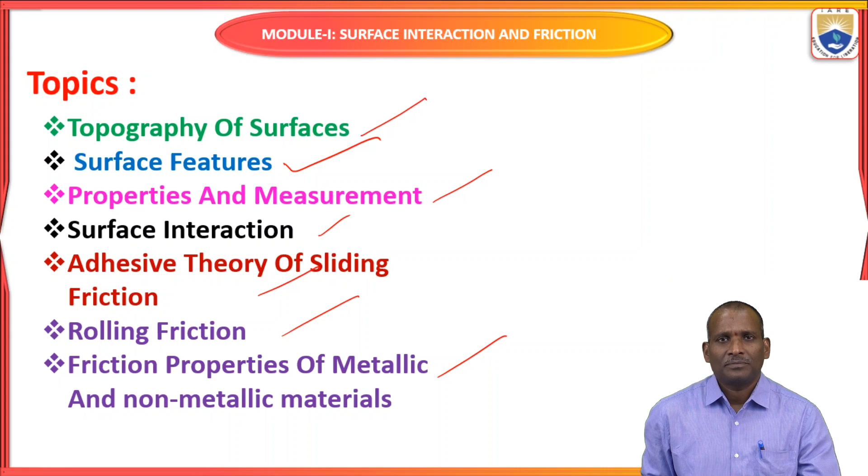The friction properties of metallic and non-metallic materials: what are these properties? And then friction in extreme conditions, and thermal considerations in sliding contact. All these topics we will learn under Module 1, surface interaction and friction.

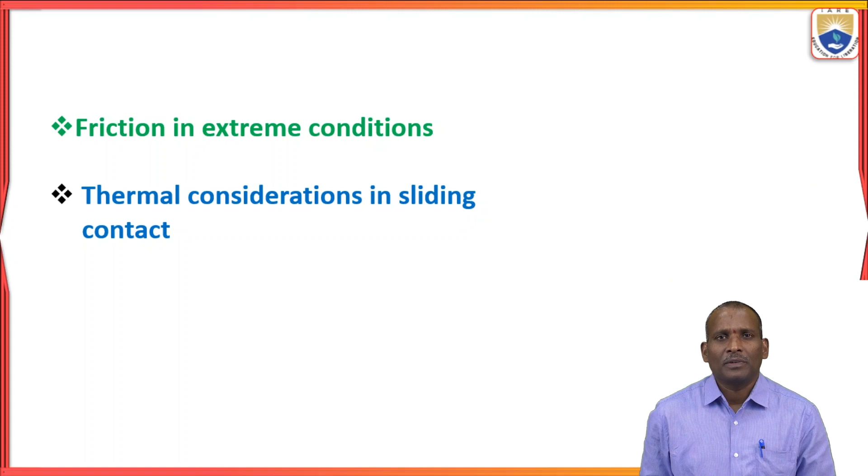Now we will see one by one from the start. First I want to give a small introduction about the tribology subject. Tribology is the subject study of friction, wear and lubrication. This subject covers these three topics: friction, wear and lubrication.

The word tribology came from the Greek word tribos, which means rubbing - the rubbing of one part on another part, the contact between two surfaces. It may be smoothly rubbing or roughly rubbing, depending on the surface.

That's why we should learn what is the importance of surfaces in tribology and how many types of surfaces are there, which we will see in later topics. The term tribology was formed in 1966, and it is defined as the science and technology of interacting surfaces in relative motion.

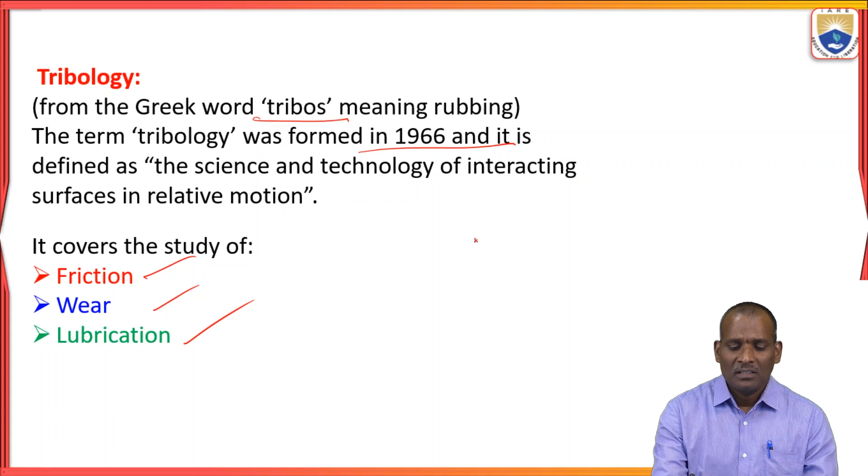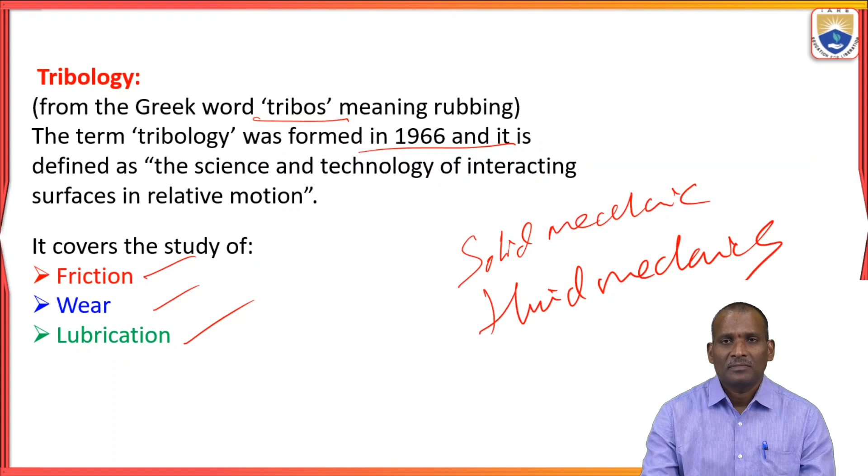What are the basic engineering subjects? Solid mechanics, fluid mechanics, material science, and lubrication chemistry. All these subjects are covered by tribology.

Particularly while designing mechanical components, that is machine components, tribology plays an important role. Why? Because continuously in mechanical components are rubbing and in contact with one another, so friction is always generated.

To reduce friction, lubrication is also required. We will study all these topics - the lubrication properties and the friction types - in the coming slides.

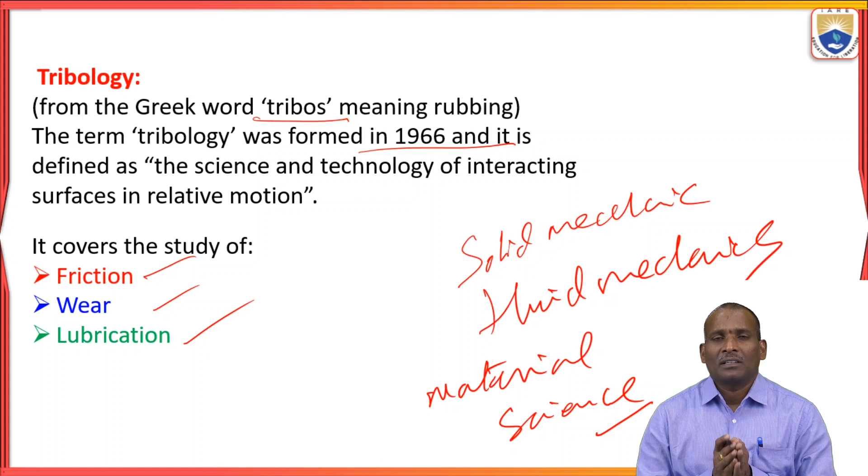Mechanical components always undergo friction and wear. That's why tribology is at the heart of their functions. In gear functions and bearing functions, tribology plays a very important role. That's why we should learn tribology concepts.

See in this diagram, they are creating fire by using sticks. This is a very old process. In ancient times, around 5 lakh BC, early humans learned that by rubbing sticks together with great force, they could create fire. By applying force, they rub sticks together.

Due to the friction property, the fire is created. They didn't know this property was friction, but at the time they wanted some fire for cooking purposes. That's why they used sticks, rubbing them together, and the fire was created.

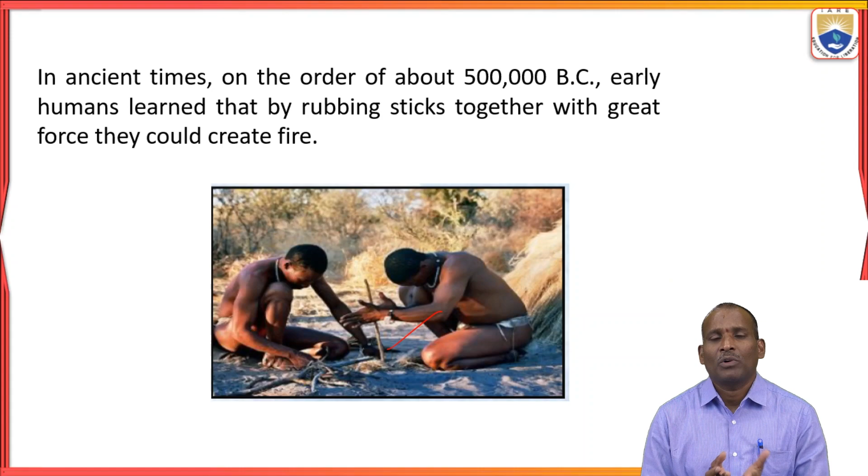Similarly, see in this picture, rolling motion requires less effort than sliding. What do you mean by rolling motion and sliding? Already I told you at the start, friction is of two types.

One is rolling, another is sliding - rolling friction and sliding friction. Which one is better? Compared to sliding, less friction is generated in rolling. But with sliding, friction is generated and more effort is required to pull the vehicle or any object.

That's why at that time the wheel was invented, around 3500 BC. First they were using sliding. So instead of sliding, they created the wheel.

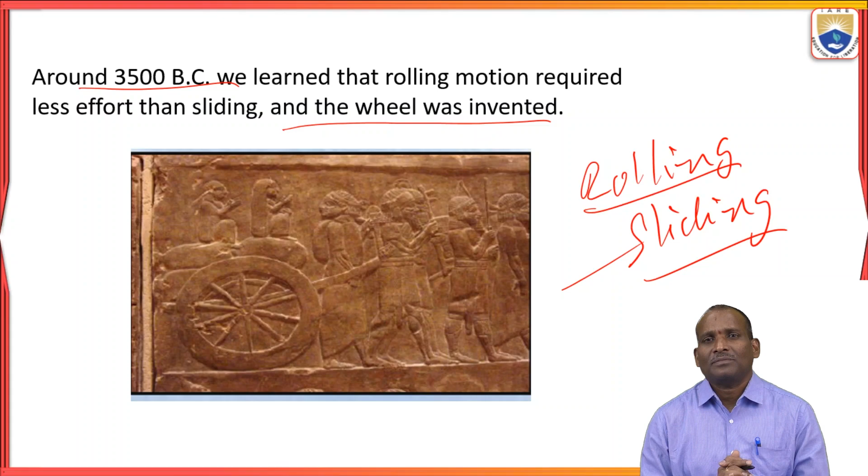Why? Because in rolling, less effort is required. It moves freely. So tribology is a multidisciplinary subject, not only for one particular branch, not only for mechanical subjects. Tribology properties are important everywhere, in multidisciplinary subjects. What are they? The multidisciplinary subjects are material science, environment, life cycle assessment, nanotechnology, lubrication chemistry, tribochemistry, biomechanics, friction, molecules, machine design and machine elements, solid mechanics, fluid power systems and fluid mechanics.

It is a study of friction. One is friction and wear properties, and then lubrication. Which type of lubrication is required? What is the lubrication mechanism during relative motion? Example, bearings and gear transmission systems in mechanical engineering.

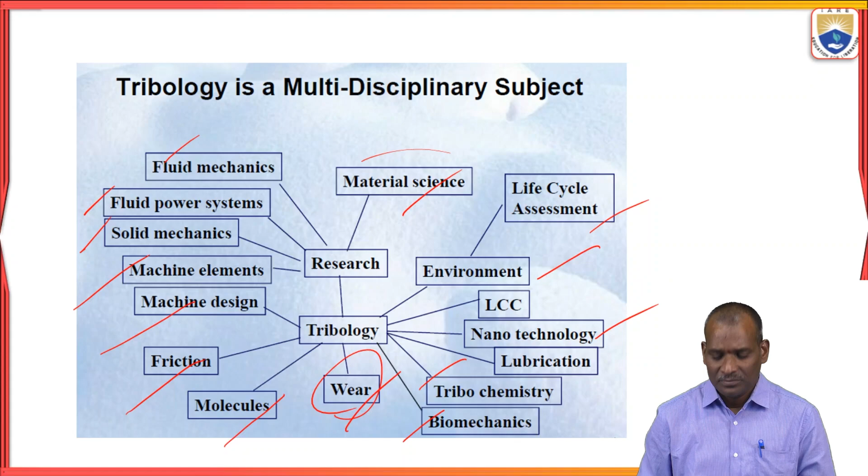As I already told you, tribology is everywhere - not only in mechanical engineering, not only in chemical engineering, but also in other branches like electrical engineering. That's why you can say tribology is everywhere.

Example, the tire rolling on the road. High friction is required, as shown here. For the tire material and the road, there is friction. How much friction is required - high, low, or medium? Due to the friction property, there is grip between the tire and the road. If less friction is there, suppose there is no friction, the slipping chances are very high when friction is very low between the tire and road.

The tire is one surface and the road is another surface. Whenever these two surfaces interact and contact one another, friction automatically generates. So we can create wonders using this friction. Sometimes there are advantages, and sometimes disadvantages.

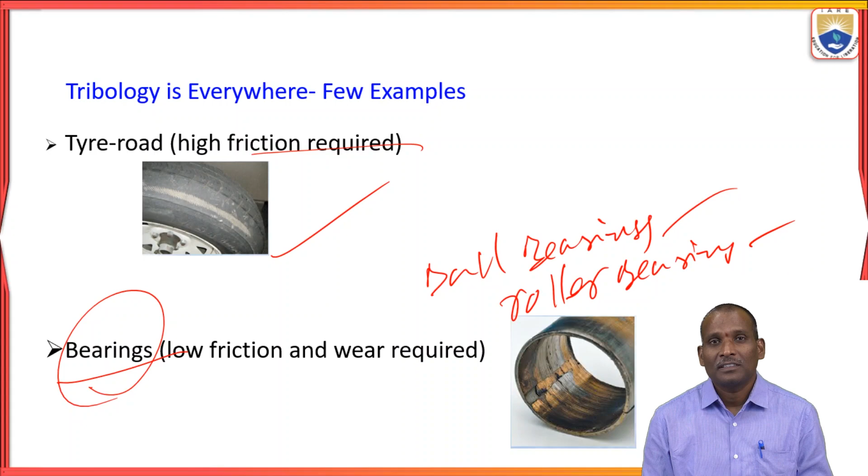Bearings are classified into ball bearings and roller bearings. Two types of bearings are there, and while designing these two, the tribology concepts are very important.

Next example, joints. Joints are classified into two types: temporary joints and permanent joints. Permanent joints are fixed together, for example welding - two plates are welded together with weld material. If you want to dismantle or replace one plate, you can't remove it, because it's a permanent joint. If you want to replace it, you have to completely destroy the joint.

Whereas in temporary joints, like nut and bolt, you can replace, remove, and dismantle them. Whenever you want to dismantle the assembly, you can easily do so. In this case, low friction is required and no wear in contact - there is no wear in contact. The nut contacts the threads on the bolt. This is one type of joint, called a temporary joint.

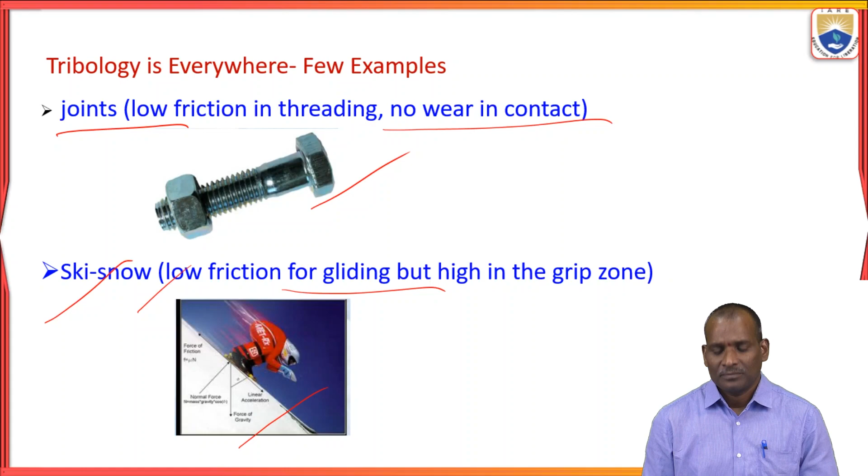Next example, shoe and floor. Medium friction is needed for easy walking and dancing. Daily we are walking on a road, on a floor, with shoes, so there is friction between the shoe and the surface. How much friction is required here? Not high friction and not low friction, only medium friction. Then only can you walk very easily on a floor. While doing dancing or playing, the medium friction is required.

Next example is the brake disc, also a mechanical component. Controlled, stable friction is required, not too low or not too high, very stable, like medium friction. While using disc brakes, this type of brake we use for vehicles. Friction is required for stopping and starting. If you want to stop the vehicle while running, the brake is required. How does it function? With the help of friction property. Without friction, we can't stop the vehicle. Here we are using one medium, the brake surface. So which type of surface is required for the brake material? You have to study the surfaces, types of surfaces.

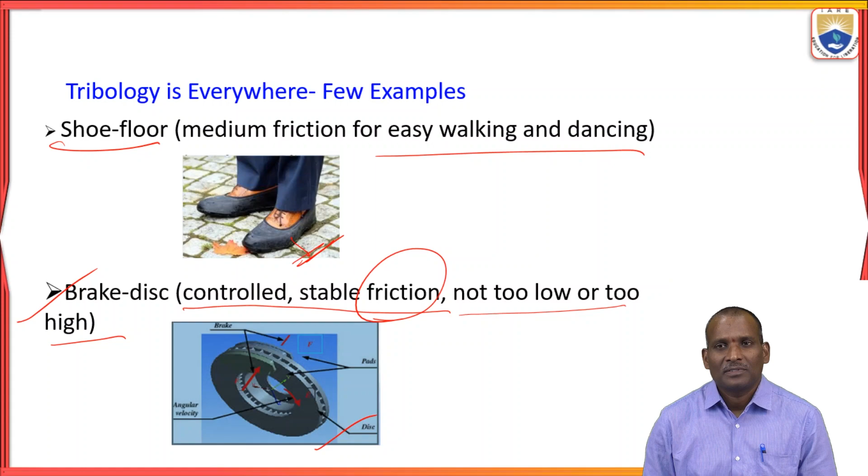Next, cam and follower. The cam and followers are used in engines for valve opening and closing. This type of mechanism is required in IC engines. In between the cam and follower, there is a contact, a point contact. There is no wear and low friction. By using this mechanism in engines, the valve opening and closing will occur.

Next, piston, ring, and cylinder. This is the piston and these are piston rings. There is friction between these, while the piston moves inside the cylinder, a rubbing action occurs between the cylinder and the piston surface. On the piston surface, the rings are mounted. These rings are classified into two types, oil rings and compression rings. Detailed explanation is not required at this stage. We are concentrating on wear property and friction property, and the third one is lubrication property. That's why the tribology subject revolves around these three topics: friction, wear, and lubrication.

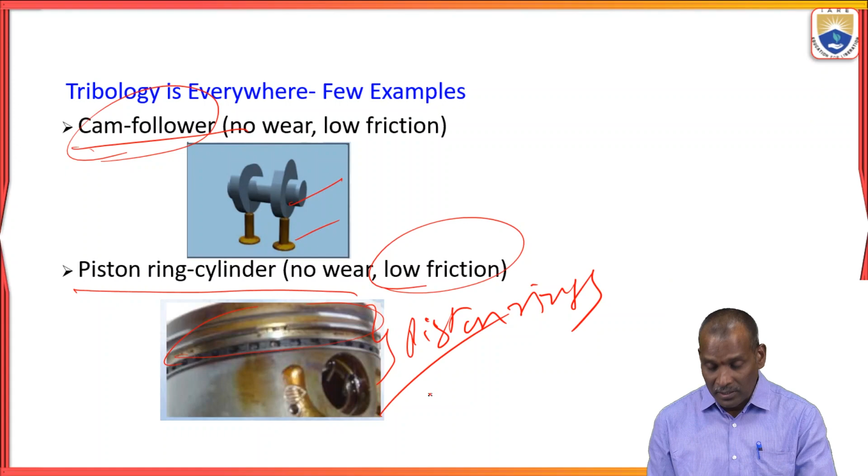While designing piston rings, you should concentrate on wear properties and friction properties, and at the same time lubrication is also required while moving. It moves from top dead center to bottom dead center, and again bottom dead center to top dead center, where it is in motion. We will study this in four-stroke engine working. For this arrangement, no wear and low friction is required, not high friction. Suppose in the piston, while rubbing, while in relative motion, high friction occurs, what will happen? The friction will damage the piston rings. After some time, the piston will jam in the cylinder, and there is no further movement in the cylinder. If the piston movement is not there in the cylinder, there is no power, no power stroke, no output. The engine will not move forward. That's why friction property is also required here while designing the piston and piston rings.

Next example, in our daily routine life, we use chalk and board while teaching lessons, chalk on a board. Here, controlled wear process occurs. Some friction is there and wear is also there, but it's controlled wear, not too much wear. That is controllable, so we can easily manage that wear.

Due to the wear property, what will happen here? While writing on a board, the chalk material is scoring. So after some time, what will happen? The material, the chalk, gets destroyed in the form of powder.

Similarly, pen and paper is a controlled wear process. We can control this type of wear, but in an engine's case, ball bearings, rolling bearings, pistons, cams and followers, we can't control the wear process. If you are not using proper material, proper lubrication, or not designed with proper surfaces, then wear must be possible.

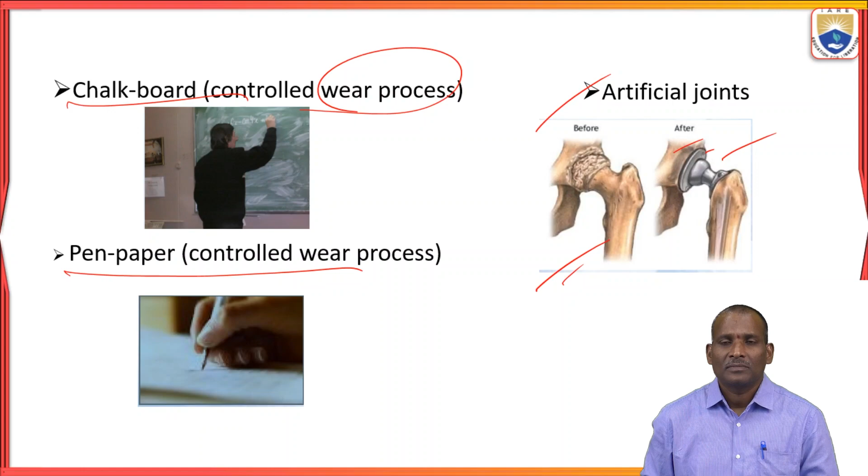Next, now we will discuss about the tribo system. In this tribo system, there are 4 elements. One is element 1 and element 2.

Element 1 and element 2. These two are contacting one each other.

So there is a tribo element 3, the interfacial medium, this one. When it is sliding or rubbing, then tribo element 4 will act as the surrounding environment.

That is element 4, the surrounding environment, which includes temperature and moisture condition.

So tribo element 1, element 2, and element 3 is the medium, the interfacial medium, like a lubricant. This is said to be the tribo system.

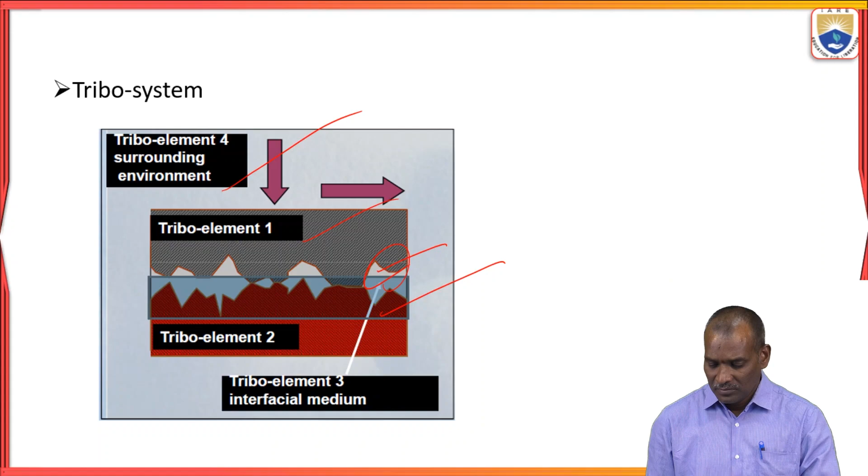Now, considering the complexity of the tribological system, it may be pointed out that friction and wear characteristics of materials are not their intrinsic or inherent properties.

But are highly system dependent. So intrinsic properties are inherent properties, as opposed to extrinsic properties.

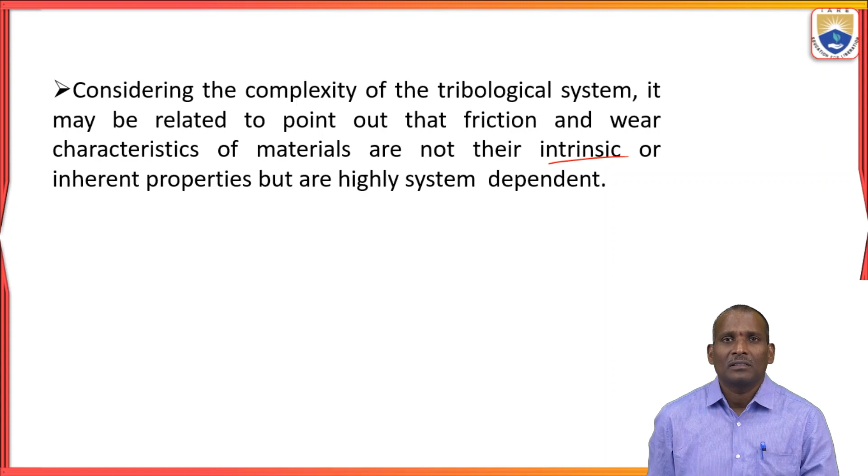The intrinsic properties are like boiling point, melting point, and density of the material. Extrinsic properties are mass and volume. The wear characteristics of materials are not these intrinsic properties.

So coming to the topic of friction, we meet friction in all aspects of everyday life, by walking, moving, dancing, and stopping or turning a car.

So in walking, everyday friction appears, and then moving, stopping or turning a car.

Suppose you want to stop a car while moving on a road. With the help of the friction property, that component is called a brake.

Turning, if you want to turn a car, by using the steering mechanism you can easily turn a car.

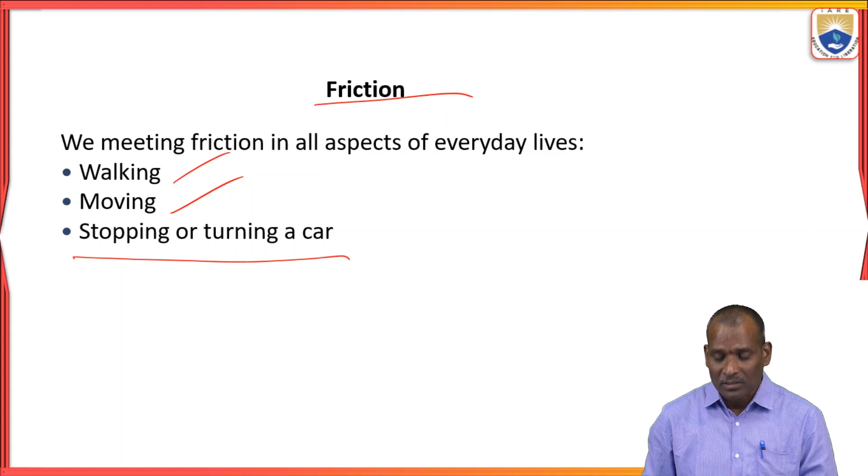So the steering mechanism has bearings and lubrication. It works on friction and lubrication.

The Egyptian pyramids and tombs led to the invention of the wheel. Why? Because of the major cause of energy dissipation, frictional heat generation, and temperature rise.

Suppose here one block is there. You are applying force on this block horizontally, that is the tangential force.

So always one force will act perpendicular to this tangential force, that is the normal force.

And one important force is there between these two blocks, that is friction.

Frictional force. So frictional force is nothing but resistance to the motion.

So in the opposite direction, suppose you are pulling this object like this, the friction force will act in the opposite direction.

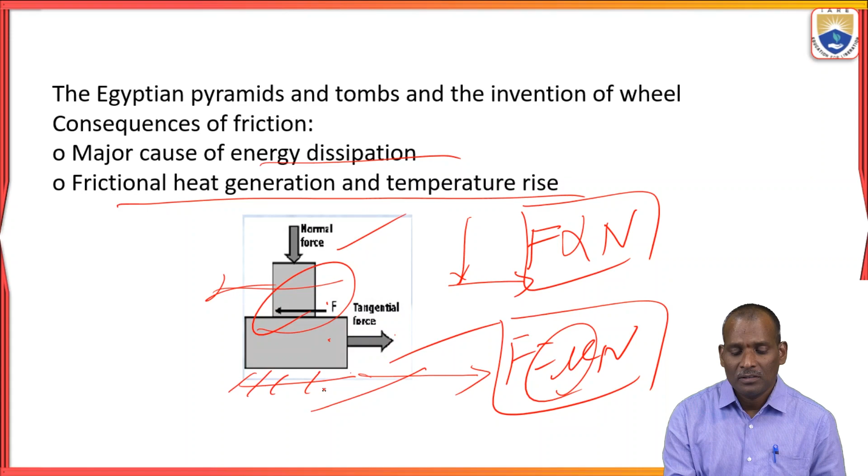Next, examples of the occurrence of sliding friction. Rolling friction is there and sliding friction. An example for sliding friction is a machine tool's sideways.

Examples for this sliding: these slides move one another, so here the sliding plates are there in the machine tool.

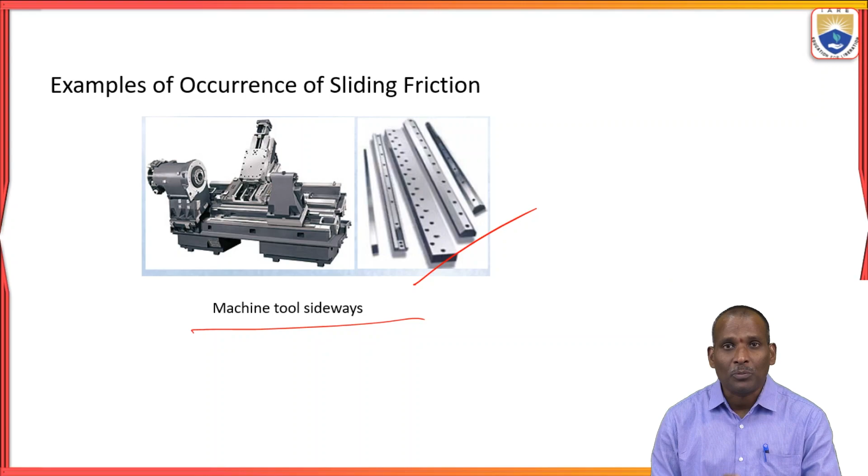The sideways are required for this machine. That's why here the sliding friction property is very important.

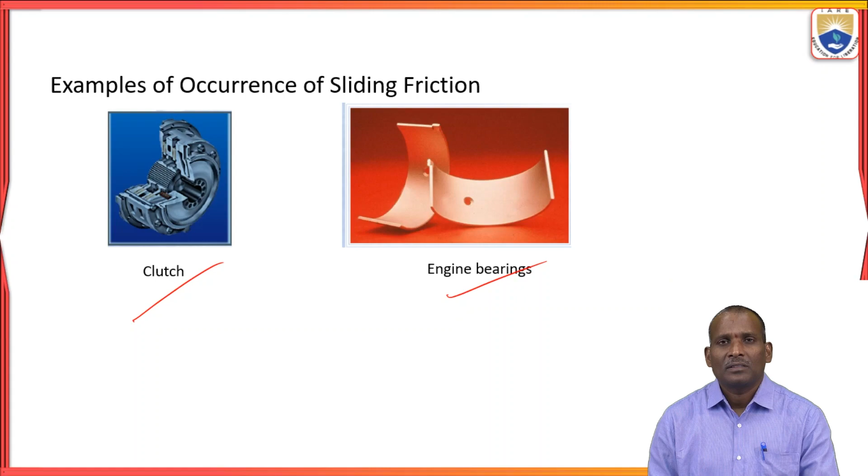So here also, the clutch and engine bearings, the clutch movement, clutch plates, the friction between one plate and another.

Occurrence of sliding friction here: ball bearings, wheel on rail, and gear transmission.

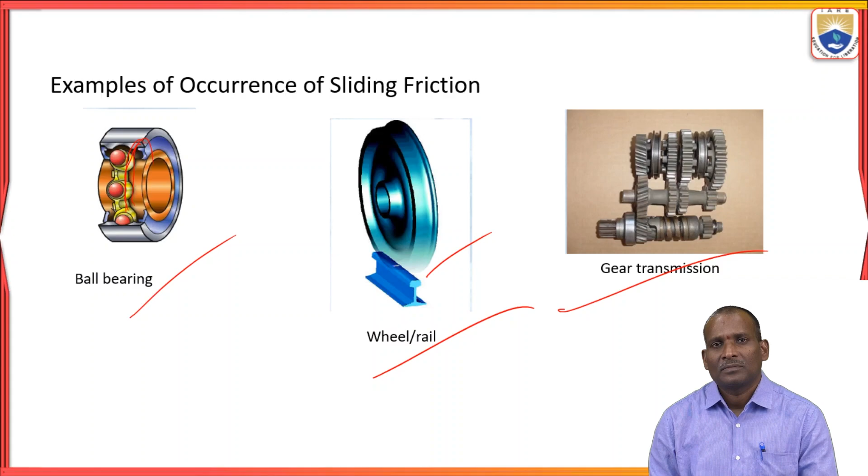So here the wheel on rail is sliding, and at the same time the sliding motion and rolling motion are also there. Here ball bearings rolling, and due to this rolling, the balls are moved slides like this. So these balls are arranged in a case.

Next, the friction is affected by the following points. What are they? We will see. The first one is the presence of wear particles and externally introduced particles at the sliding interface.

Suppose two components are in contact, and the two component surfaces are in sliding motion. So there is a presence of wear particles in between this sliding. Suppose two sideways are moving like this, sliding, and in between these, suppose some wear particles are present. What will happen? The friction will be generated. Due to this friction, some material will damage, and you have to replace this sideways.

Similarly, the second point: relative hardness of the materials in contact. So this material's hardness and this material's hardness are different. They are in contact, then possible friction. Externally applied load and displacement.

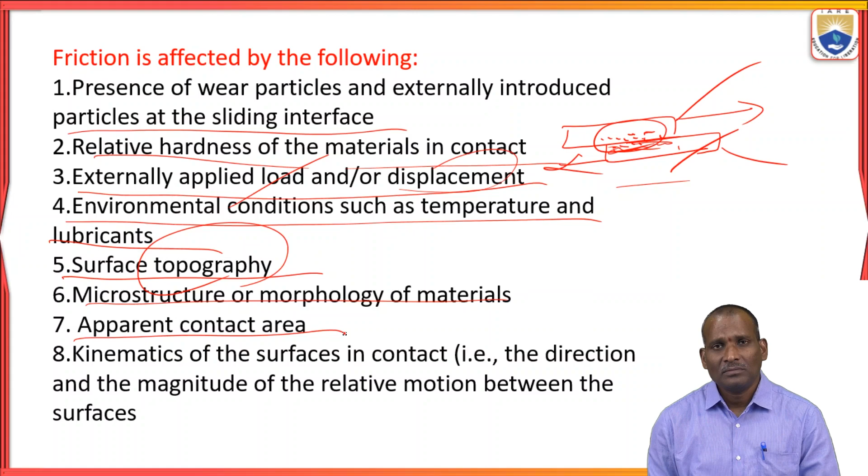Microstructure or morphology of materials and apparent contact area. What is the contact area between these two? Suppose here the contact area is the surface contact, or suppose two wheels are contacting like this - then there is a point contact between these two. So what is the area of this contact? The friction depends upon this area of contact.

Suppose a surface is there as a block, and I apply load like this. This is normal force and here tangential force.

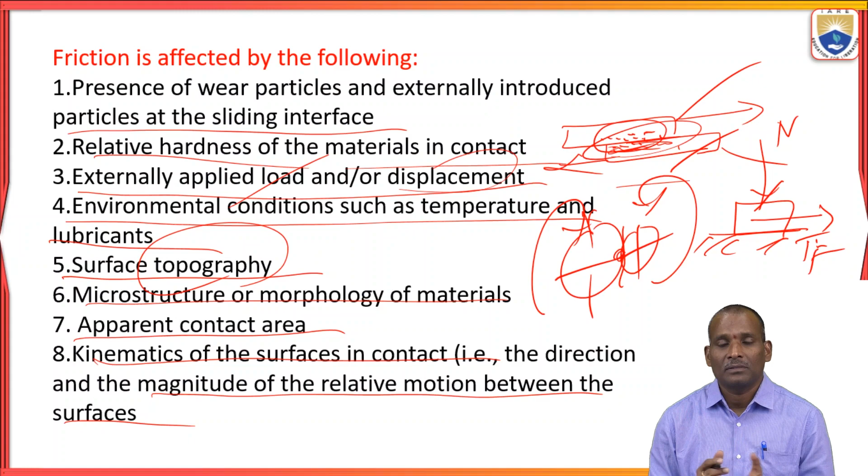Next is kinematics of the surfaces in contact - that is the direction and magnitude of the relative motion between the surfaces. So kinematics of the surfaces means the direction in which you are applying load, the magnitude of load, and the relative motion between these two surfaces. That will lead to friction. So that's why friction is affected by relative motion between two surfaces.

So that's why surface topography plays an important role in determining the performance of various tribological machine components. Suppose you want to determine the wear properties of a particular material, wear characteristics - if you don't know the surface topography, you can't calculate, you can't analyze. That's why the type of surface topography plays an important role while determining the performance of various tribological machine components.

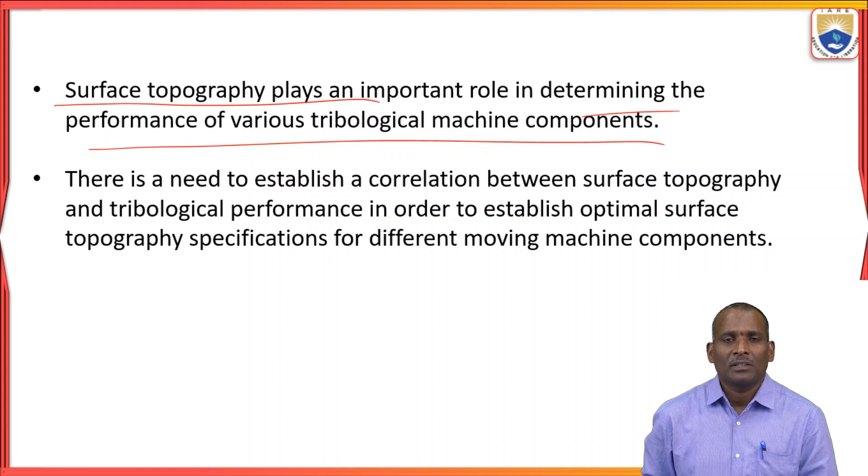So there is a need to establish a correlation between the surface topography and tribological performance in order to establish optimal surface topography. First you establish a relation between these two, compare and validate the tribological performance and surface topography for different moving machine components. Then only you can find the optimum surface topography for a particular application, for particular moving machine components.

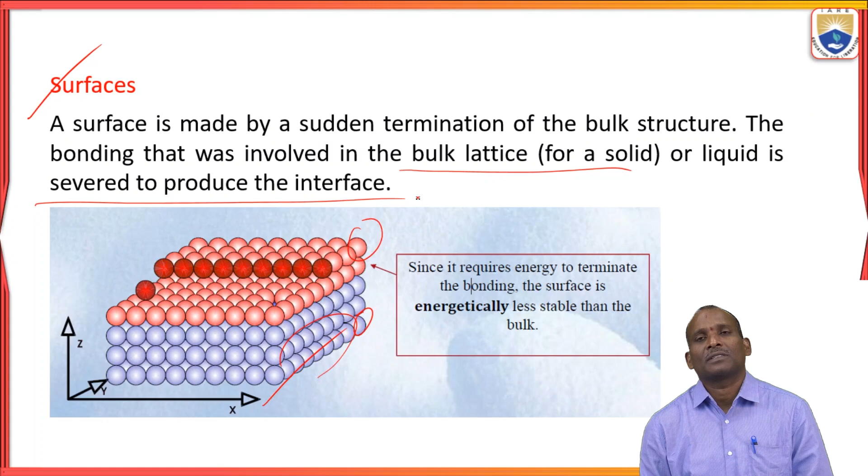So this type of energy, required to terminate the bulk structure, is called surface free energy. In the case of liquid interfaces, this energy is called surface tension. So surface free energy is the term used for solid interfaces, and surface tension is the term used for liquid interfaces.

So why is surface required? Without a surface, you can't transfer the force from one surface to another surface. You can't apply, you can't use the application without another surface. Suppose you want to write a topic on the blackboard - you want one surface, that is pen and paper. Similarly, chalk and board.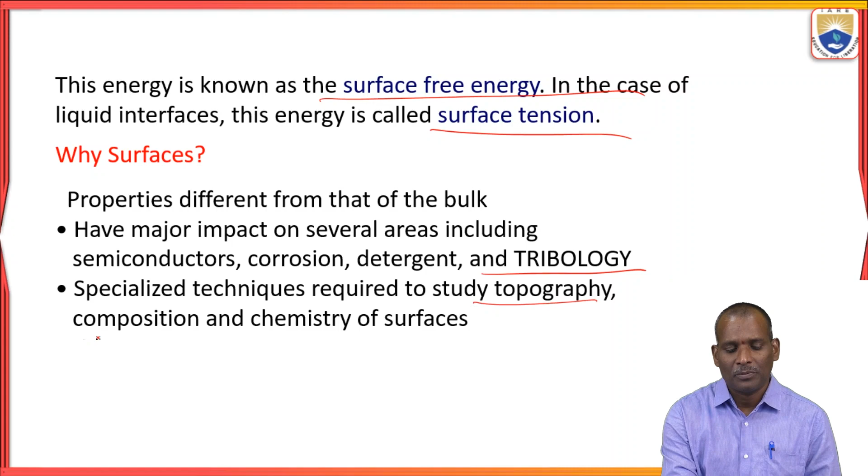Surfaces have a major impact on several areas, including semiconductors, corrosion, detergent, and tribology systems. Specialized techniques are required to study the topography, composition, and chemistry of surfaces.

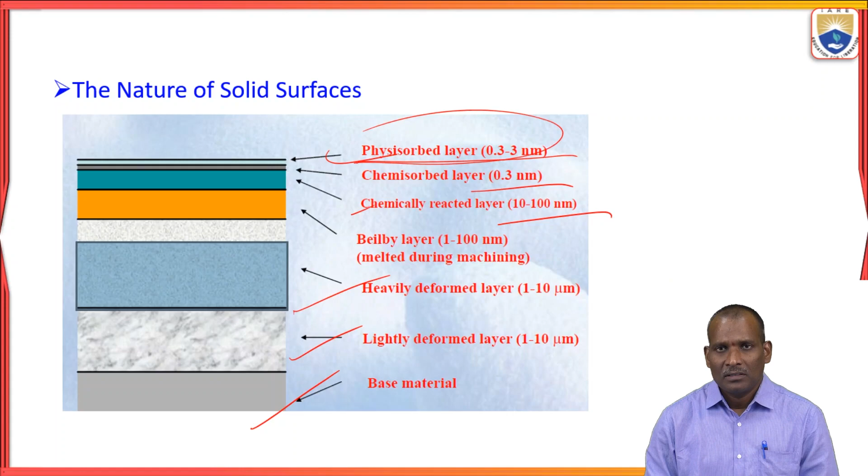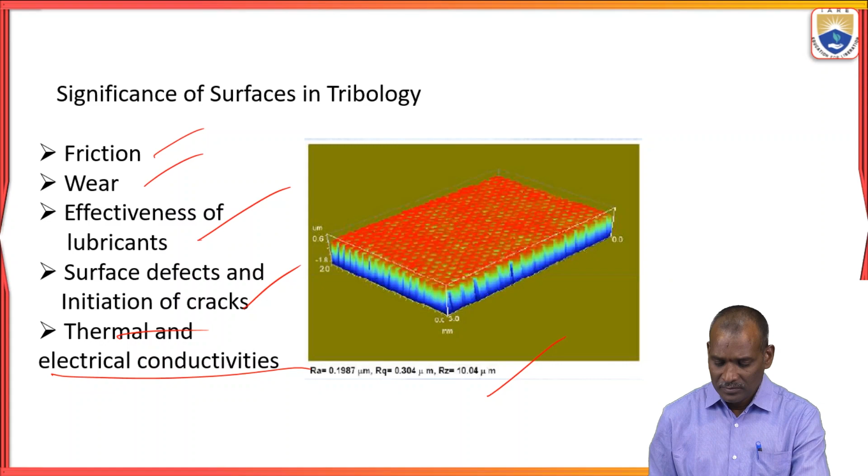Surface defects are caused during manufacturing. When manufacturing a machine component, a lot of defects can occur. Defects occur due to cracks, internal or external, craters - which are nothing but small holes - folds, seams or laps, and heat affected zones.

All these defects you can't see directly. By using some examination methods, you can detect them. There's also intergranular attack, metallurgical transformations like temperature, pressure, cyclic transformations, plastic deformation, worn tools, inclusions, residual stresses and splatter. These are all surface defects.

Some defects occur internally and some externally. If an external defect is on the surface, you can detect it very easily by seeing it - there's no need for separate testing. For detecting surface defects, there are methods: non-destructive methods and destructive methods. Using different methods, you can determine the defects. All these defects occur during manufacturing, due to poor quality of material, poor operation, or not using proper guides or proper machining tools.

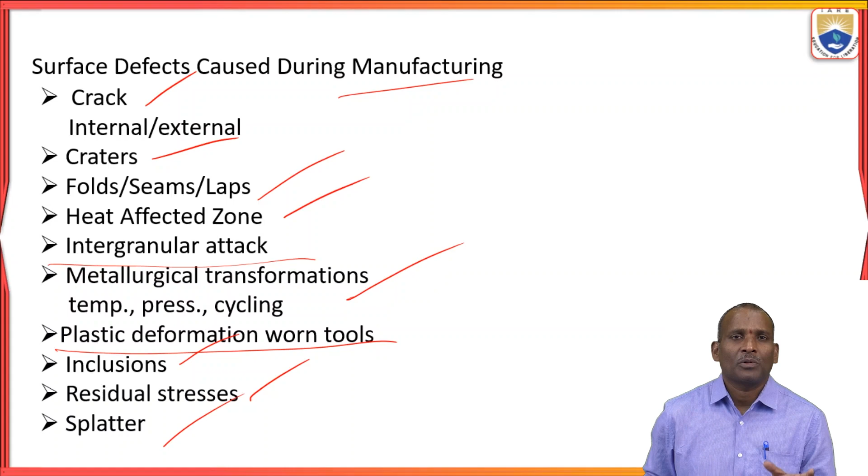Surface characterization is possible by using the general features of the surface, the chemistry of the surface, and the mechanical properties. By changing the features of the surface and the mechanical properties of the materials, you can enhance the material for better efficiency. Through surface characterization, you can create the best optimal surface for your desired application.

The general features of the surface include appearance and shape. What is the shape of the surface? It may be rectangular, circular, or square. The appearance, the color, and the elements present - which type of elements are in the material and surface - the chemistry, and the phase distribution.

And then mechanical properties - there are a lot of these: hardness, creep, fatigue, modulus, yield strength, toughness, malleability, stresses and strains. All these are called mechanical properties. Most surfaces depend upon these mechanical properties, so while designing a mechanical component you should concentrate on these properties - what property is required for a particular application.

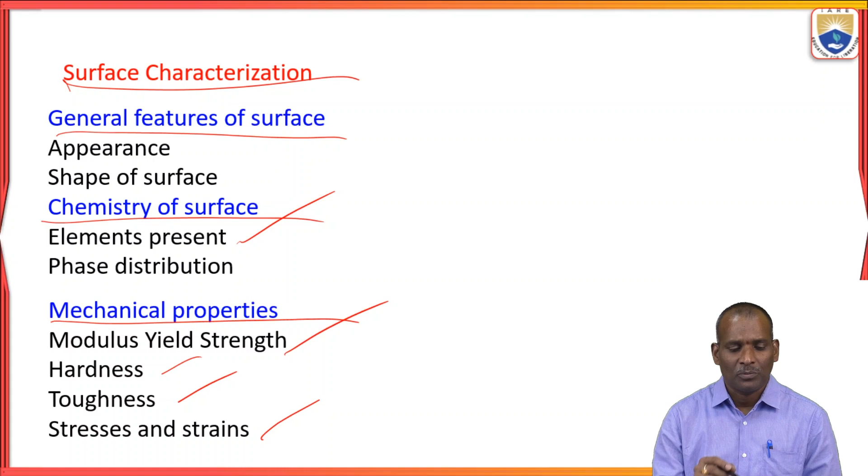Brittleness and ductility: ductility is used for steel and mild steel, while brittleness applies to cast iron, depending on when brittleness or ductility is required. Surface characterization is possible by changing all these properties.

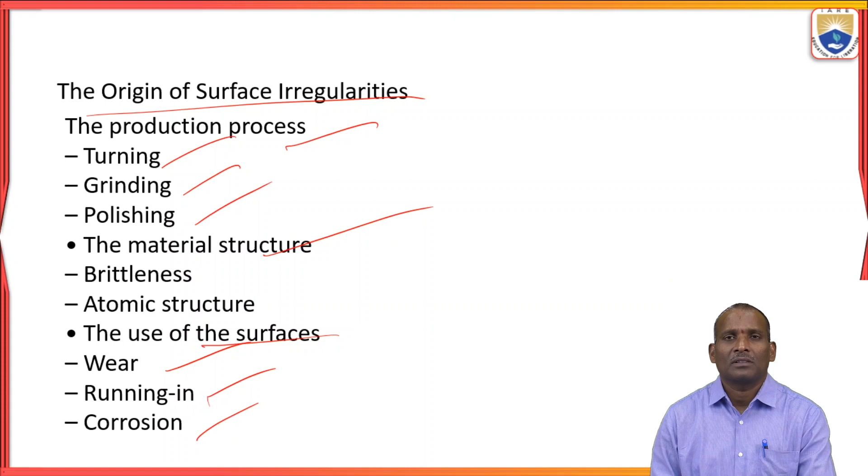The origin of surface irregularities: what is the cause? During manufacturing, the production process - turning, grinding, polishing - when machining, grinding, or polishing, some irregularities occur. That is the starting point, the origin of surface irregularities. Then the material structure - brittleness, atomic structure, which type of structure is there - and the use of the surfaces, such as wear condition, running in, and corrosion. All these processes lead to the cause of surface irregularities.

These are the references I have taken.